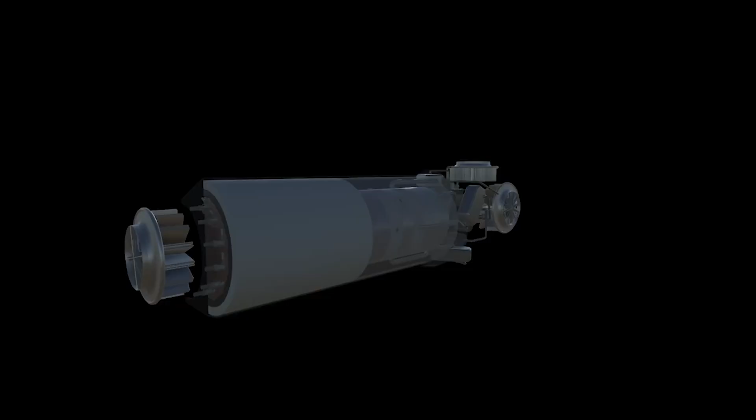The world is reconsidering nuclear power plants in the face of climate change. But what can you do to reinvent it? How will the reinvention work? Will it help in more sustainable growth, or will it help in increasing the current power figures, or will it help make the current situation easier? Let's see how the new micronuclear reactor would be a life-changing invention.

Do you think you'll see commercial fusion in your lifetime? Yes, I do think we will see commercial fusion.

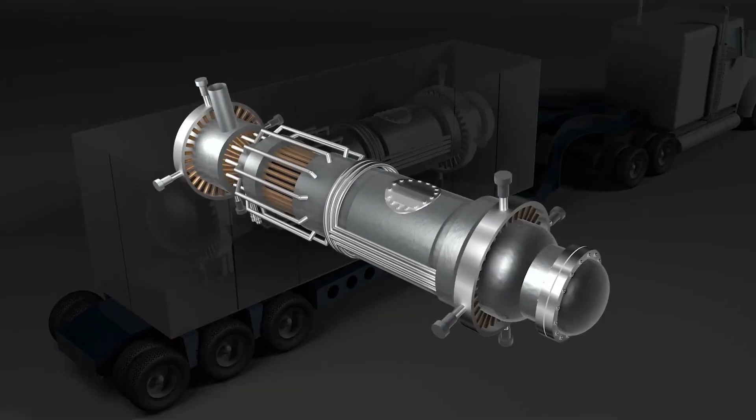Japan's venture with the Fukushima Daiichi nuclear power plant disaster in 2011 has tormented the nation's aspirations to rapidly ramp up nuclear energy for non-carbon emitting energy. Nevertheless, Japan is now driving ahead to leverage a new specialized strategy to fulfill the nation's future energy needs. Nikkei Asia documented that Japan's Mitsubishi Heavy Industries plans to build and commercialize nuclear reactors small enough to be carted on trucks by the decade's end.

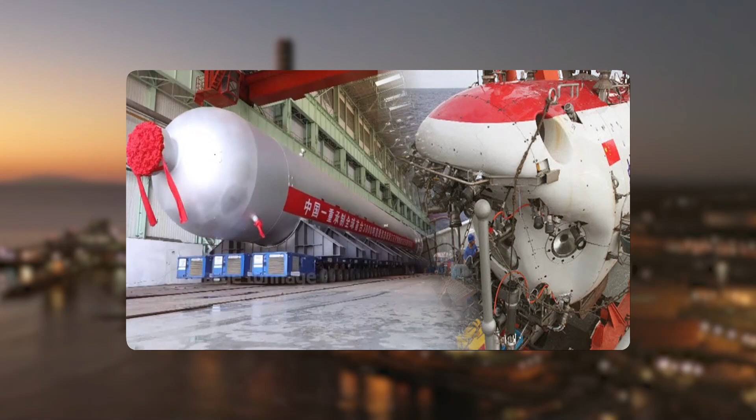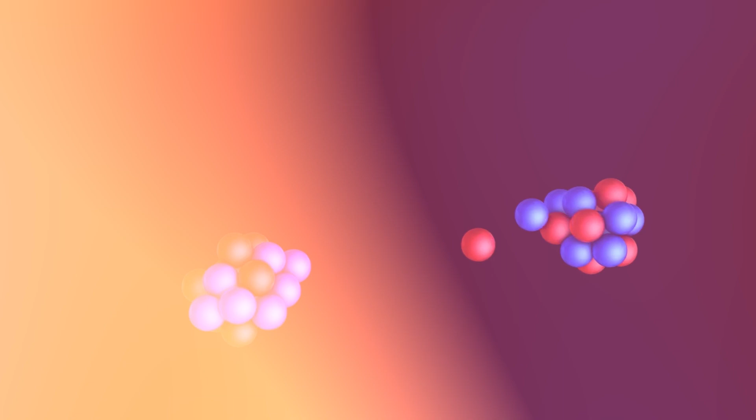The microreactors, which will be 4 meters wide and 3 meters tall, will weigh slightly less than 40 tons. The reactor and power generation kit will be housed inside a container truck, making it feasible to ferry it to remote or disaster-stricken zones. The microreactor's output will be 500 kilowatts, or 1/2000th of the capacity of normal nuclear reactors that produce more than 1 gigawatt.

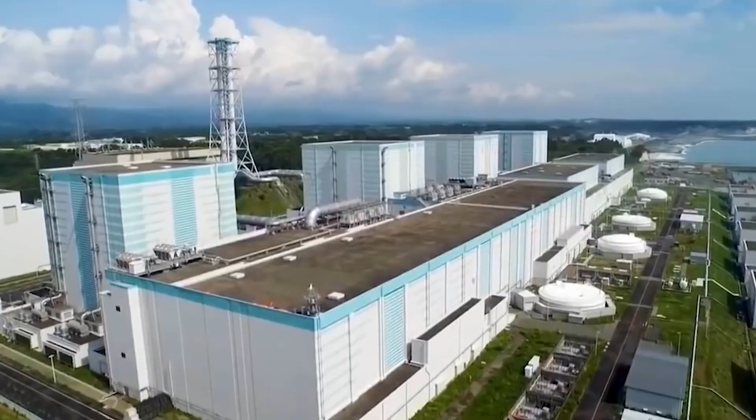As per MHI, highly enriched uranium is to be utilized as fuel, which does not have to be replaced during the absolute service life. As per the news, each microreactor will need tens of millions of dollars, especially less than the $6 billion USD or more a 1.2 gigawatt nuclear facility would need.

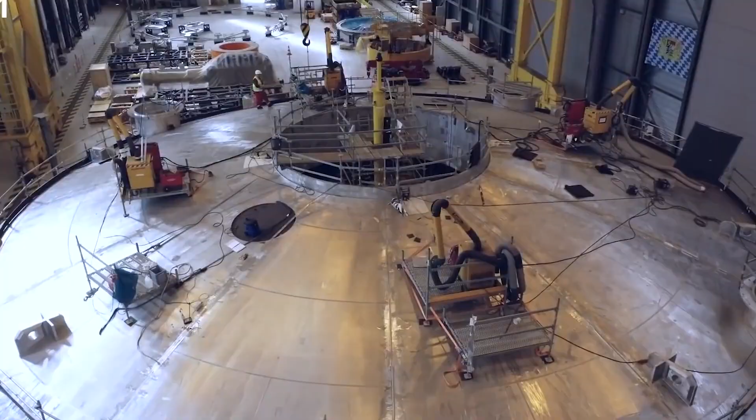The expense of building 1 kilowatt hour will be higher than that of a traditional reactor, but it will be identical to the price of furnishing power to sheltered islands now. Remote sites can fetch a cost-effective, carbon-free source of energy owing to these microreactors. The company has also designed it compact enough to be concealed underground to lessen the chance of misfortune.

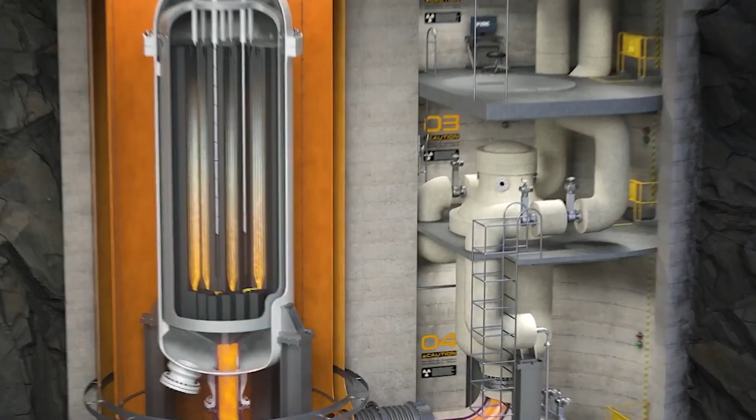The technology may be utilized in space exploration. Rolls-Royce is developing a new microreactor to provide the power for future space missions. Once the business gets clearance from Japan and other governments, Mitsubishi will commercialize the technology in the 2030s.

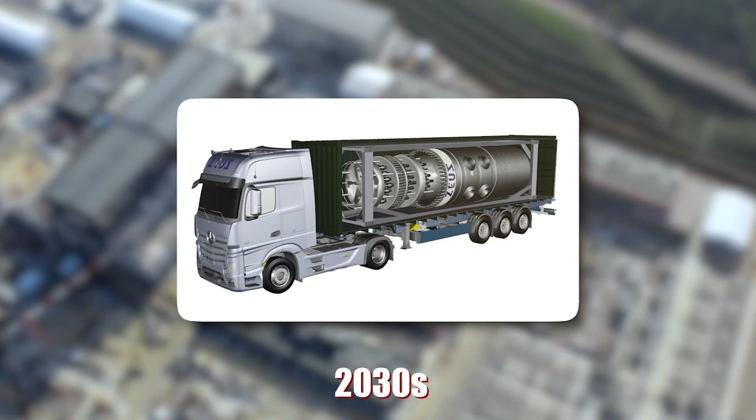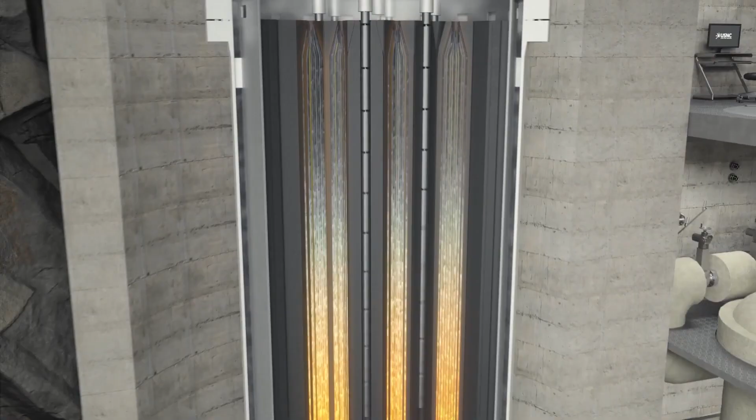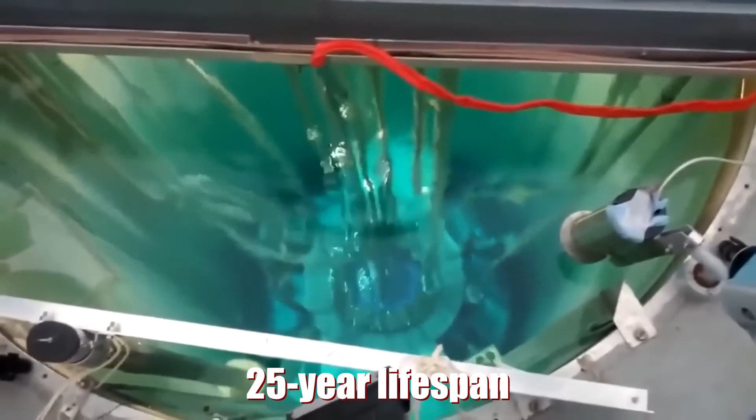Due to their proximity to populated regions, microreactors must be assembled safer than conventional reactors. The company has also addressed this, developing the technology so that all of the nuclear reactor's segments, including the core, coolants, and other equipment, are housed in tightly latched capsule containers. Likewise, highly enriched uranium will be utilized as fuel, and the reactor will not need to be replaced over its 25-year lifespan. The microreactor can be recovered once the fuel has been used up.

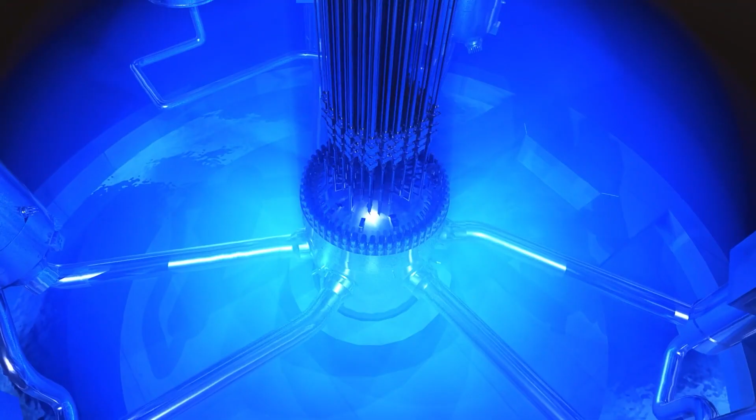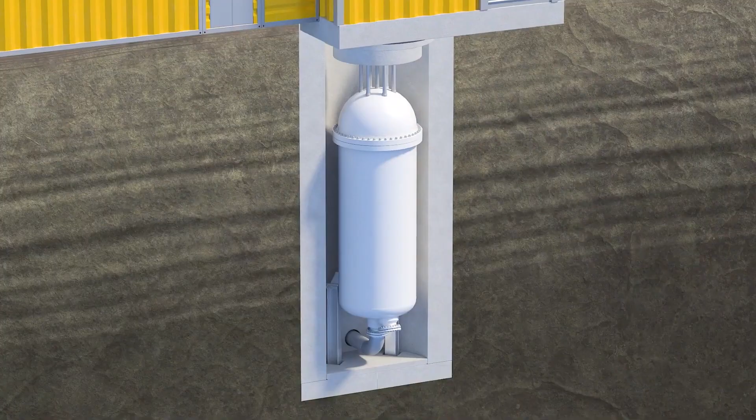The reactors can be seated underground to reduce the danger of natural disasters and terrorism because they will only need little maintenance. Mitsubishi Heavy will also reduce the probability of disastrous coolant failure. The microreactors will employ a solid-state graphite material that is thermally conductive instead of liquid coolants. The graphite wraps the core during normal function and spreads heat to the power generation system. Even when a mishap occurs, passive ambient cooling withdraws excess heat from the core.

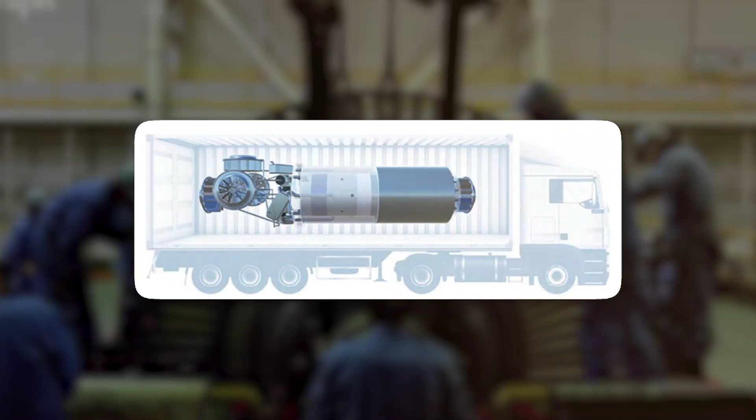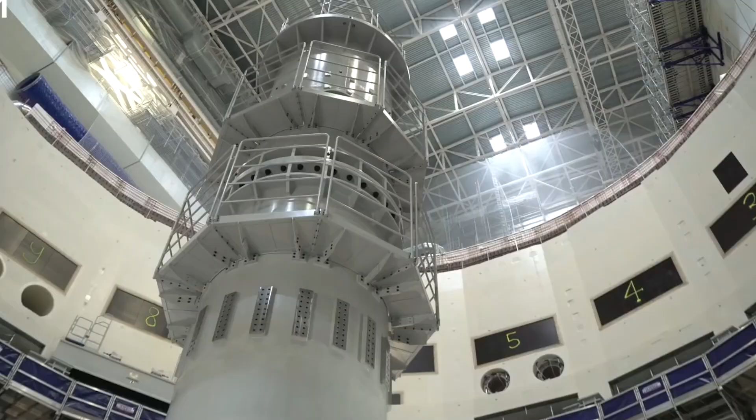These miniature nuclear reactors have been glorified as game changers on several levels. They're considered a method to avoid the cost overruns and construction delays beset by a nuclear power sector dominated by large reactors. The microreactor is developed to generate electrical power, generally up to 10 megawatts. Though the technology has not been commercialized, numerous designs are progressing through licensing in North America and Europe, with demonstrations planned in the next few years.

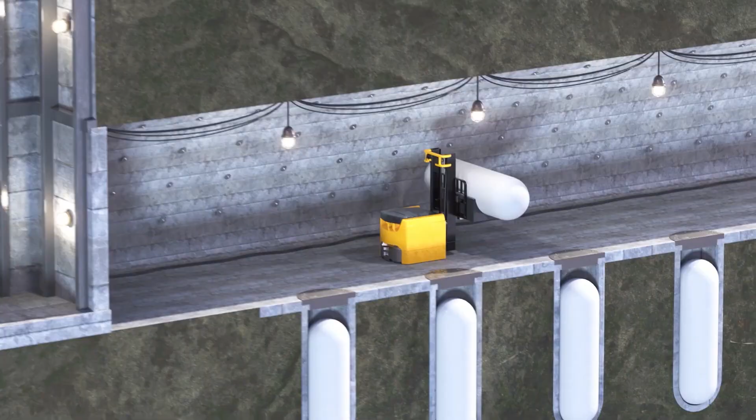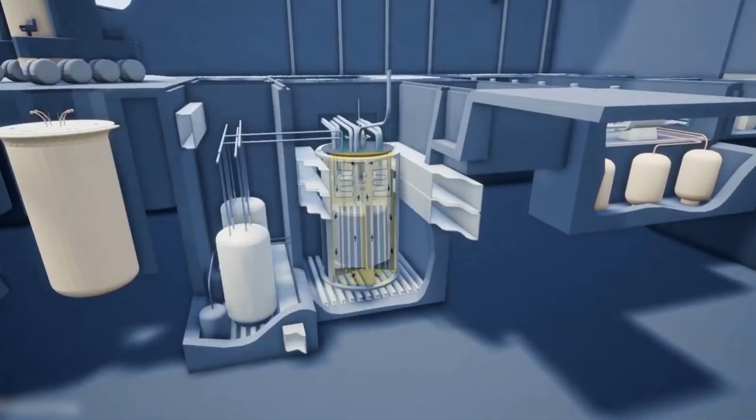Oklo, a US-based organization, proposed a license application in March 2020 to develop and drive a microreactor, with the first reactor desired to start up at Idaho National Laboratory by 2025. Microreactors are for the purpose of resilient, reliable, clean electricity for their bases. The US-based companies Westinghouse, NuScale, and UltraSafe Nuclear all produce reactors with a power output of fewer than 10 megawatts, while Sweden's LeadCold and a UK consortium led by Urenco are also designing equivalent systems.

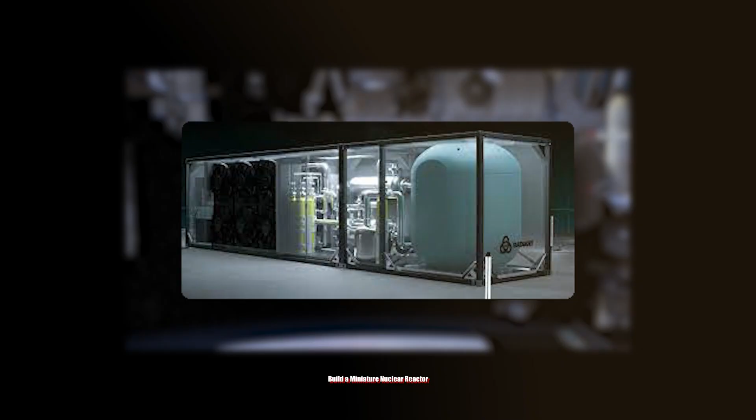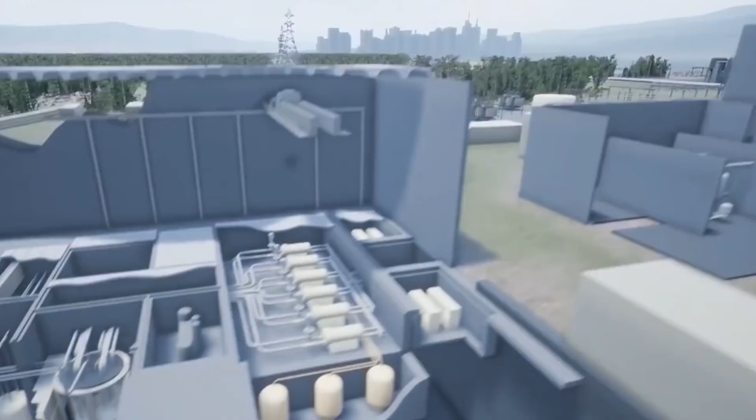Similarly, the US Defense Department recently announced plans to build a miniature nuclear reactor. Under the new initiative, the Defense Department will design a 1 to 5 megawatt nuclear microreactor at Idaho National Laboratory for a 3-year minimum test period. The report stated it would be the foremost electricity-generating Generation 4 nuclear reactor made in the United States.

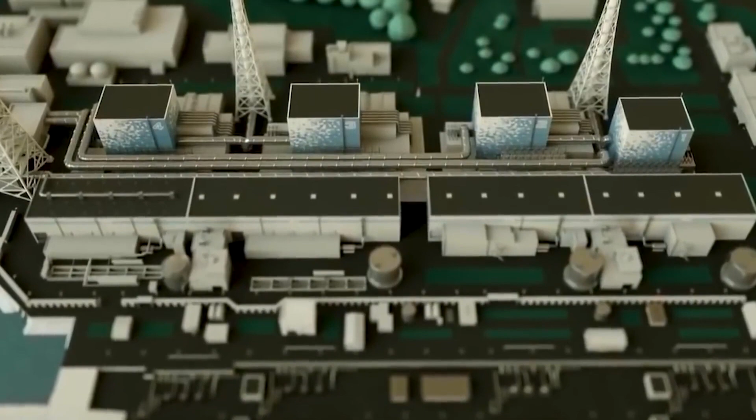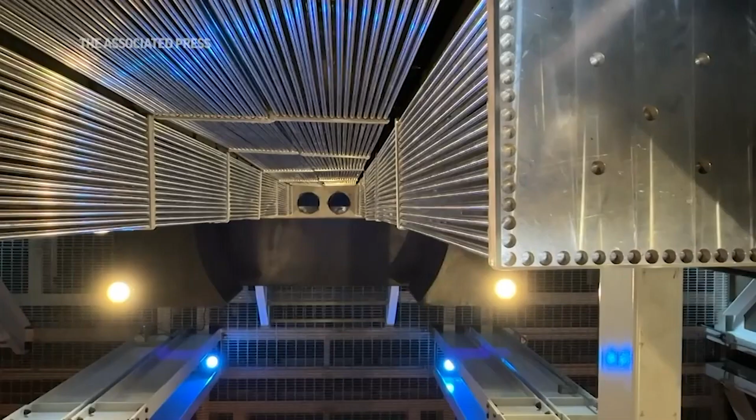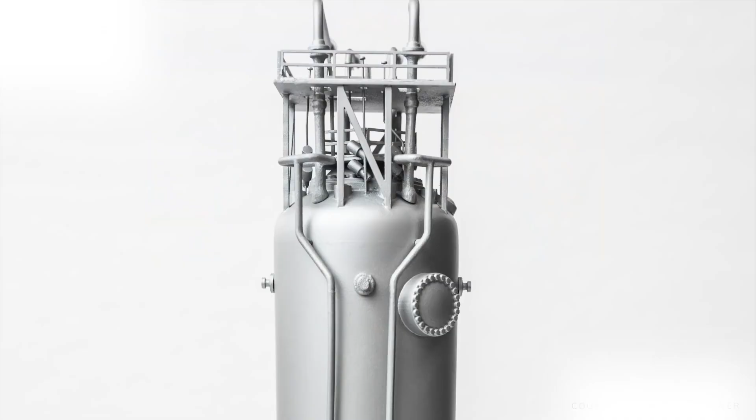Yet analysts repeatedly point out that US contenders could target microreactors, notably during shipment. Director of the nonprofit Nuclear Power Safety at the Union of Concerned Scientists, Edwin Lyman, told the media that these reactors could generate more logistical issues and risks to troops and property than would resolve concerns. Reactors are going to be much less efficient than large light water reactors and pose a number of safety and security risks. And unless the Army is keen to spend what it would take to make them unassailable for use, particularly in potential combat conditions or foreign operating bases, then it's probably rash to deploy nuclear reactors in arenas of war without furnishing the shield they would need.

Even the Department of Defense is now looking seriously at the possibility. Nevertheless, these emerging technologies will certainly influence the future of many nations' energy needs, providing them electricity for 10 years without refueling.

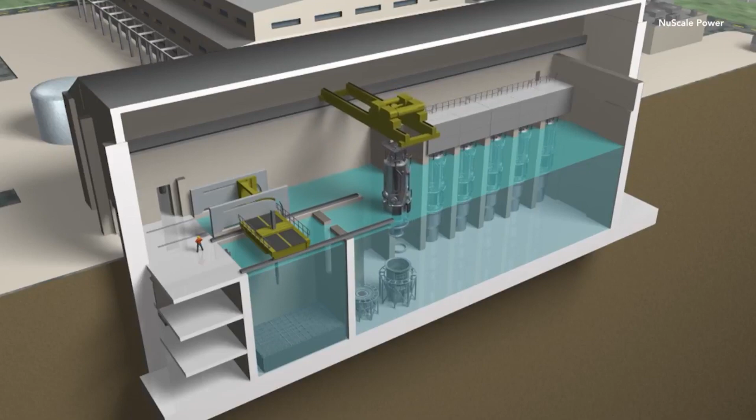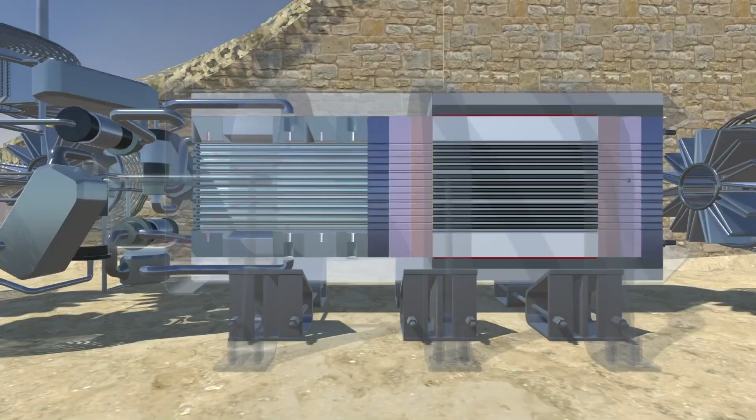Microreactors will most likely be exhibited first in outlying parts of high-income countries such as Canada or the United States. But if the technology gets verified, energy-poor emerging economies will be the most likely markets for development. So microreactors have a tremendous opportunity to provide access to clean, reliable electricity. The output, which is low like other mini reactors, can be expanded by combining several reactor units. For instance, they can be used on remote islands or as mobile emergency power stations.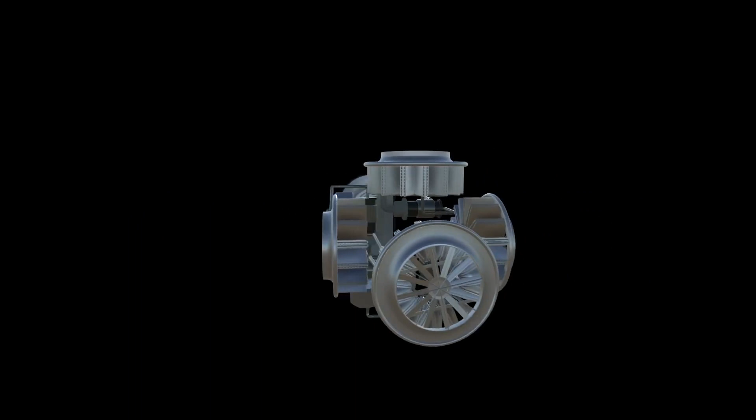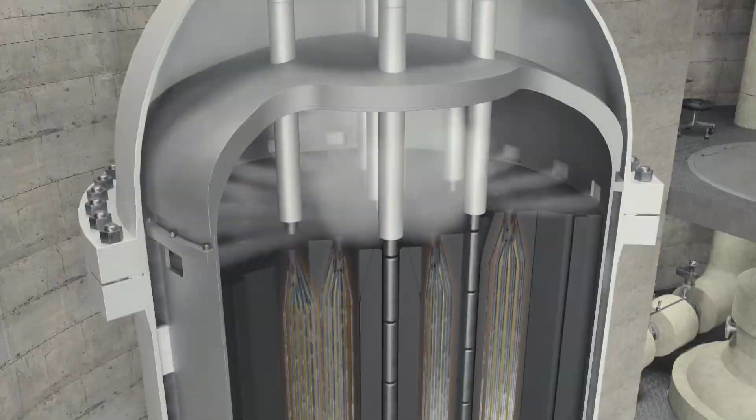Since the microreactors require minimal maintenance, they could also be installed underground. It could also reduce the risk of natural disasters and terrorism, according to a report by the media. Highly thermally conductive graphite-based material conducts heat away from the core without liquid coolant. The reactor core is to be housed in a tightly sealed capsule container. The first tests of the cooling function without nuclear fuel are to be carried out in the next 3 years. Prototype tests are planned from 2026 to 2030.

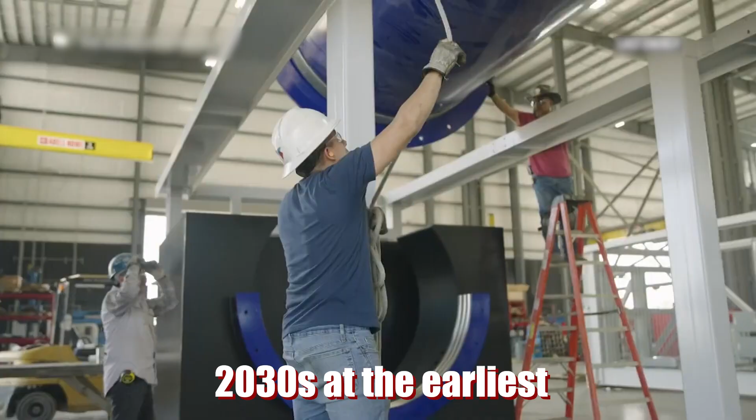Microreactors could come onto the market in the 2030s at the earliest. The cost is estimated at several tens of millions of dollars.

So what do you think? Do you consider this innovation to be a life-changing technological upgrade? Or will this serve any purpose to the emerging economies?